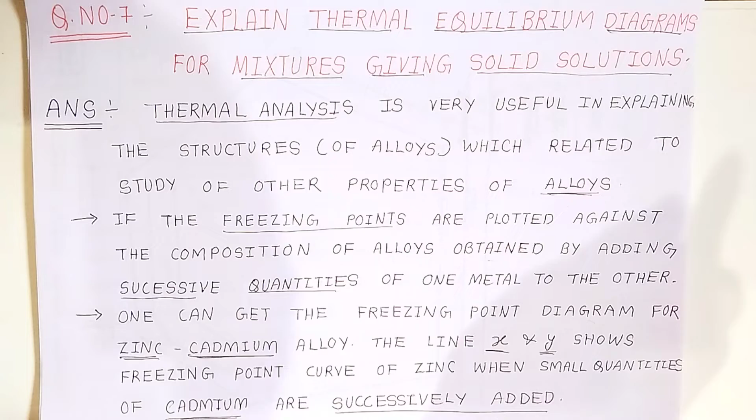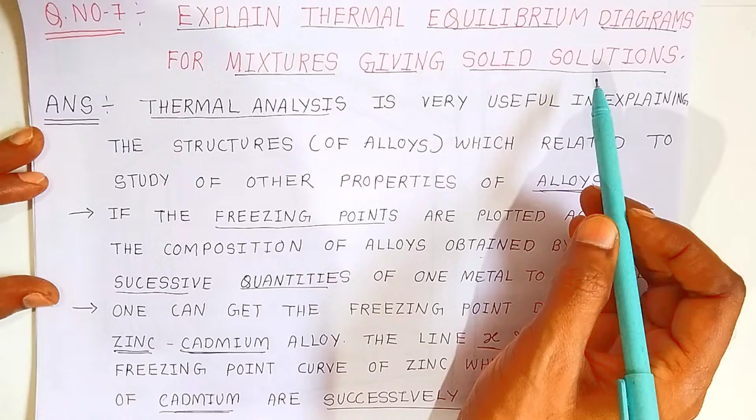In this video, we are going to see question number 7. You have to explain the thermal equilibrium diagrams of a mixture giving solid solutions. If you are getting solid solutions, we have to explain the properties on the basis of the thermal equilibrium diagram. Now, what is a thermal equilibrium diagram?

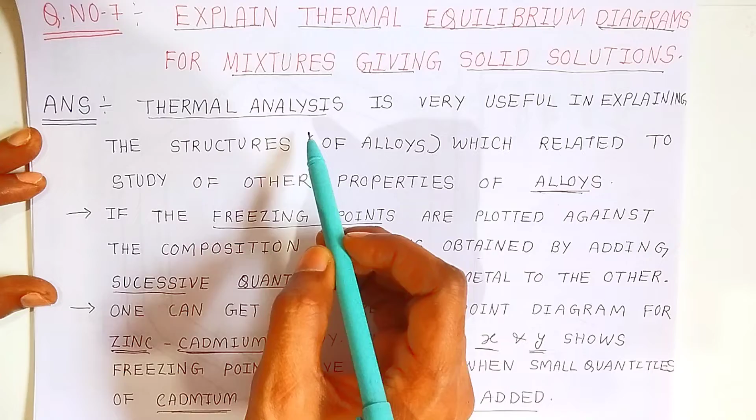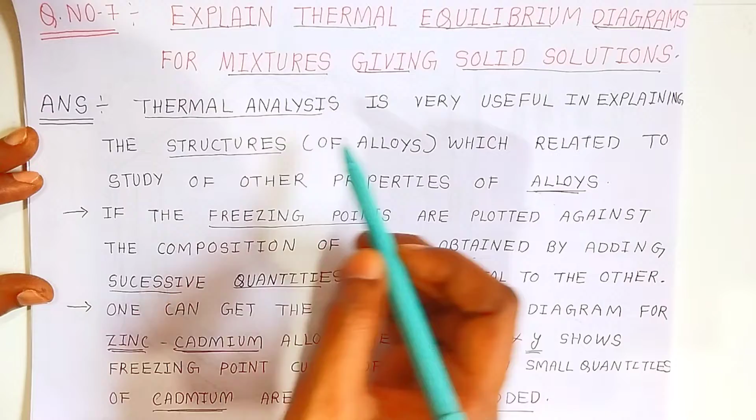First we will write the answer like this: thermal analysis. With the help of heat, we analyze the alloys. Thermal analysis is very useful in explaining the structure of alloys. It is also important for studying other properties of alloys. So with the help of thermal analysis, if you know its properties, then only you can explain the properties of alloys.

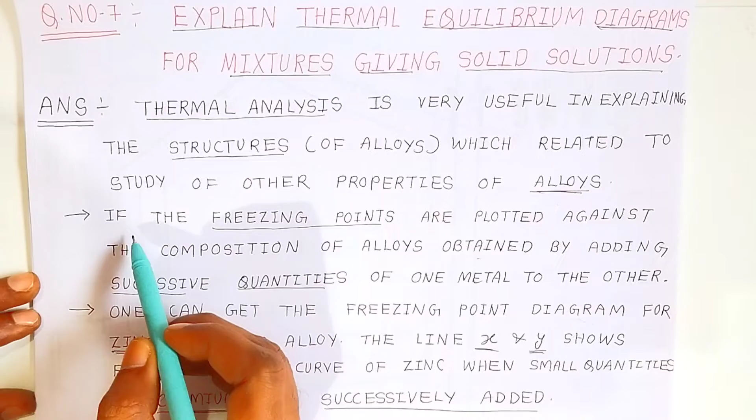If the freezing points are plotted against the composition of alloys obtained by adding successive quantities of one metal to another, one can get the freezing point diagram.

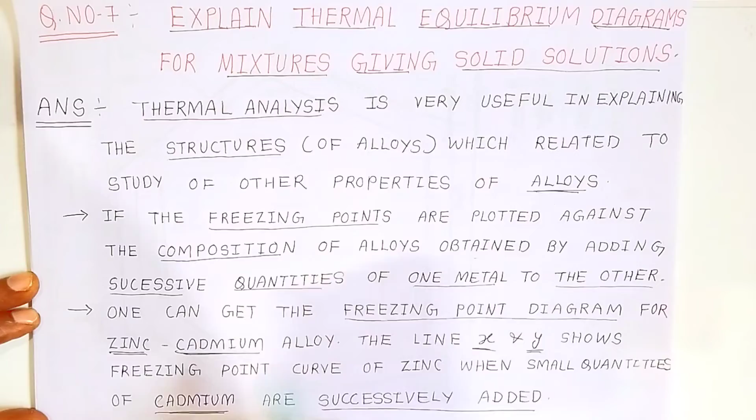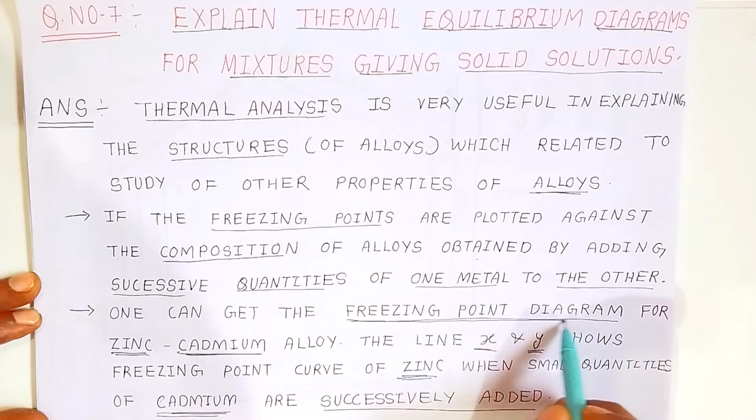For zinc and cadmium alloys, the line XY shows the freezing point curve of zinc when small quantities of cadmium metal are successively added. So we are going to see the freezing point diagram for zinc and cadmium.

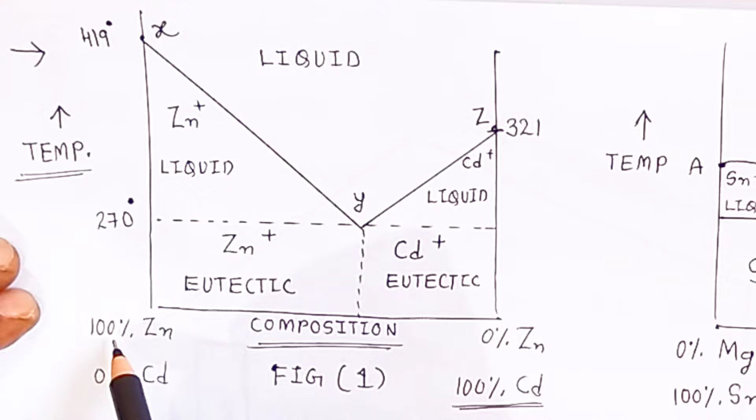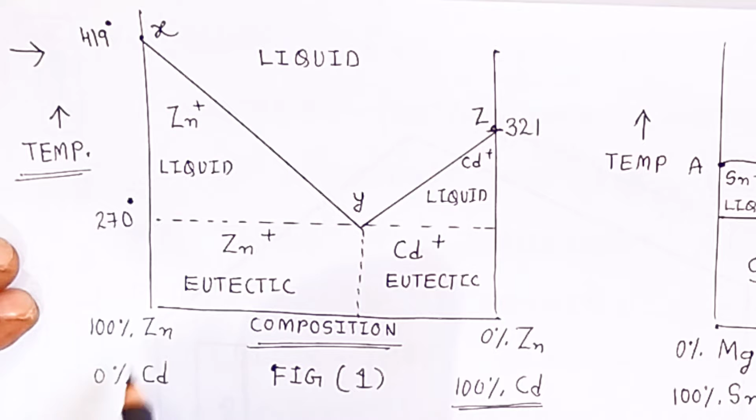When you go on adding zinc and cadmium, the composition changes - the quantity of zinc decreases from 100% to 0%, and cadmium increases correspondingly. So what happens to the temperature?

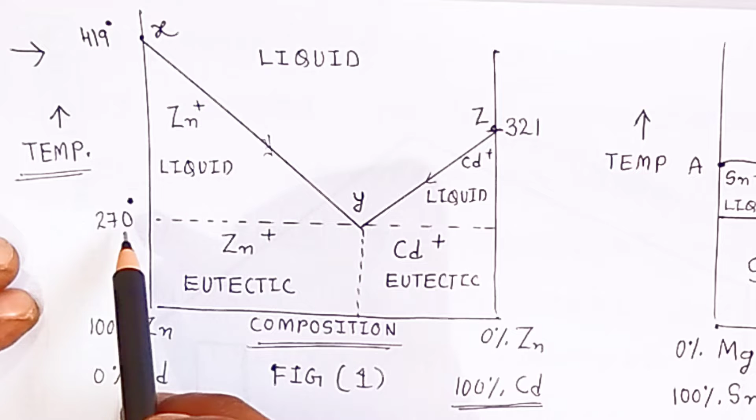The temperature of both metals goes on decreasing. See the temperature - now it is 419 degrees, it keeps decreasing, it is also decreasing. At 270 degrees Celsius, both will have the same thermal temperature at point Y.

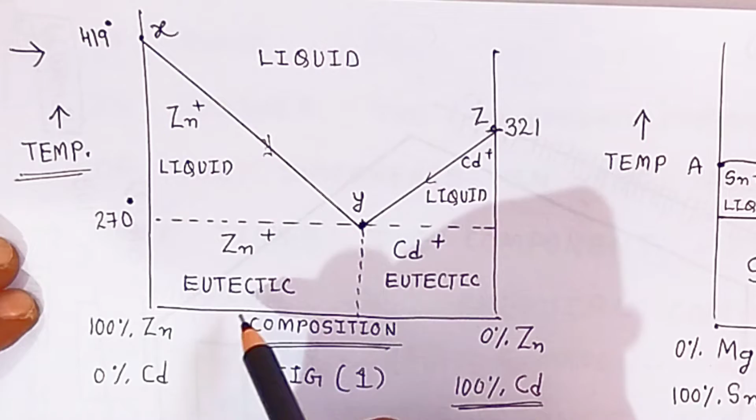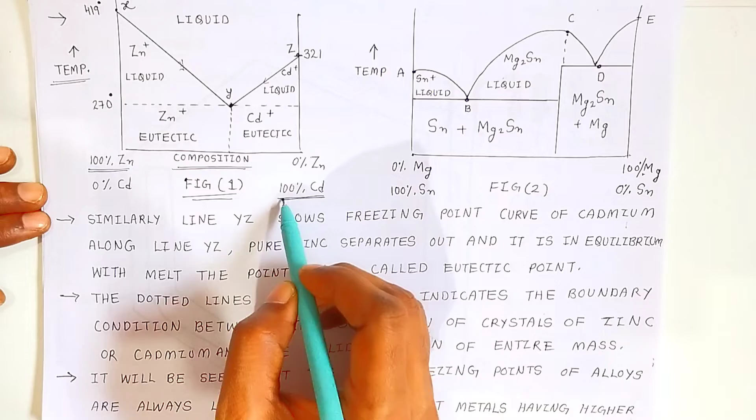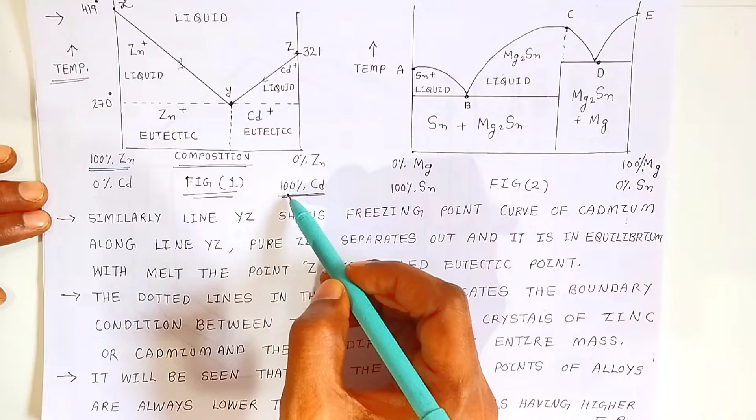That is what we wanted to show in this diagram, figure 1. Here zinc and cadmium are given - zinc is 100% and cadmium is also 100%. When we add them, zinc is present in liquid state at 419 degrees and cadmium, which is 100%, is present at 321 degrees Celsius. Both are present in liquid state.

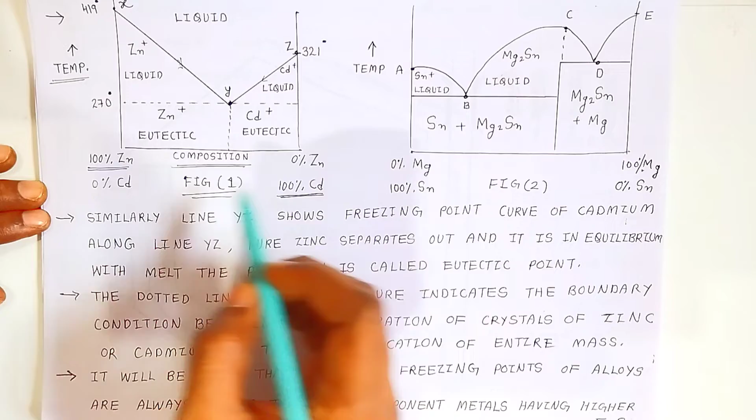When you slowly add cadmium and zinc together, as they are present in liquid state, when you slowly add them, they go to the freezing point and form the solid. See the boundary - below the boundary, all these are the alloys, the mixture of alloys. You find the freezing point at 270 degrees Celsius.

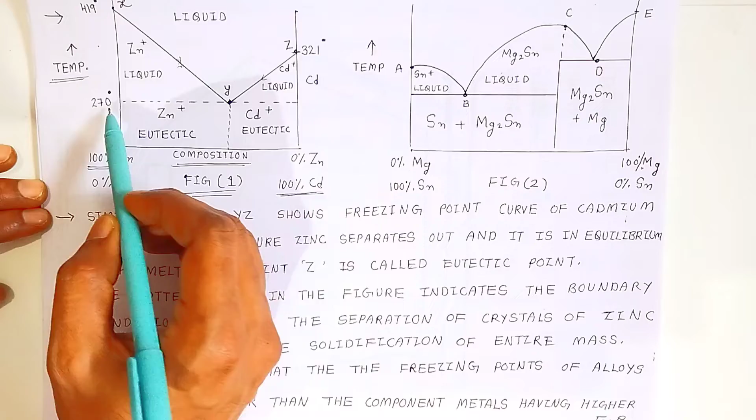This is called the eutectic point, the eutectic reaction. So they will form the solid solution - this is the freezing point of these alloys, that is 270 degrees.

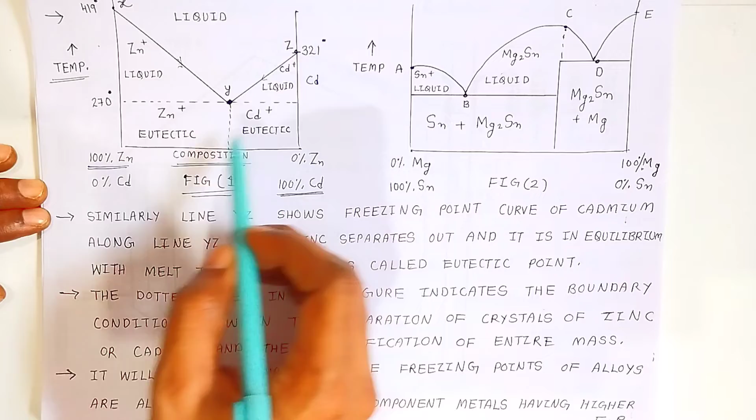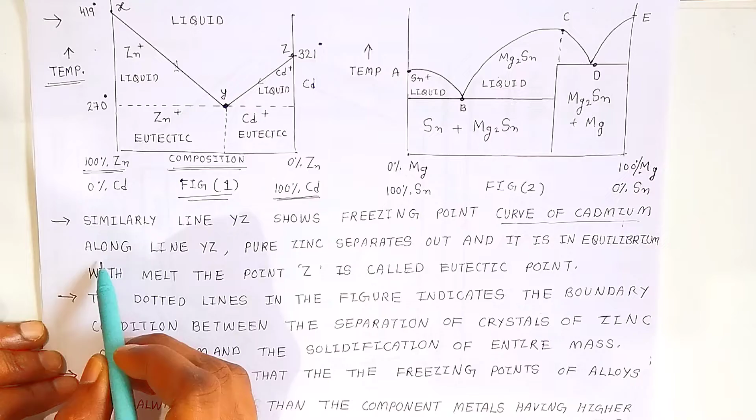Similarly, line YZ shows the freezing point curves of cadmium. XY is the freezing point of zinc, and YZ is the curve of cadmium. Along line YZ, pure zinc separates out and is in equilibrium with the melt, and point Z is called the eutectic point. This point is also called a eutectic reaction.

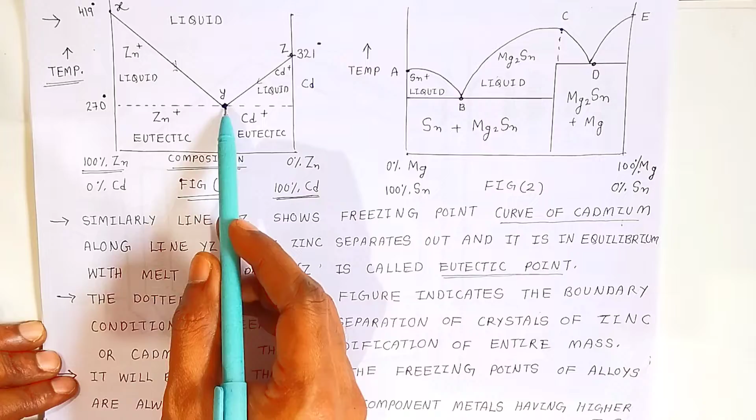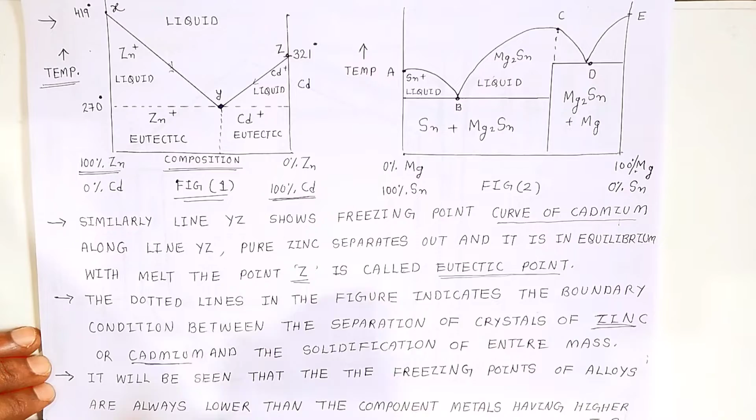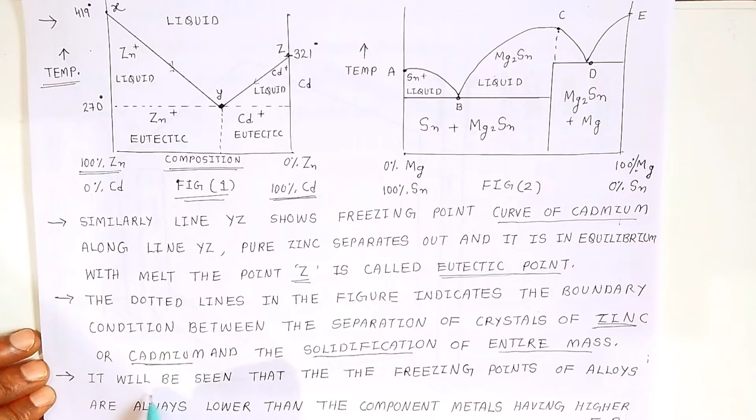The dotted line in the figure indicates the boundary condition between separation of crystals of zinc and cadmium and the solidification of the entire mass of alloys. This boundary separates the solid state of the alloys and the liquid phase of the metals. It will be seen that the freezing point of alloys is always lower - that is 270 degrees Celsius.

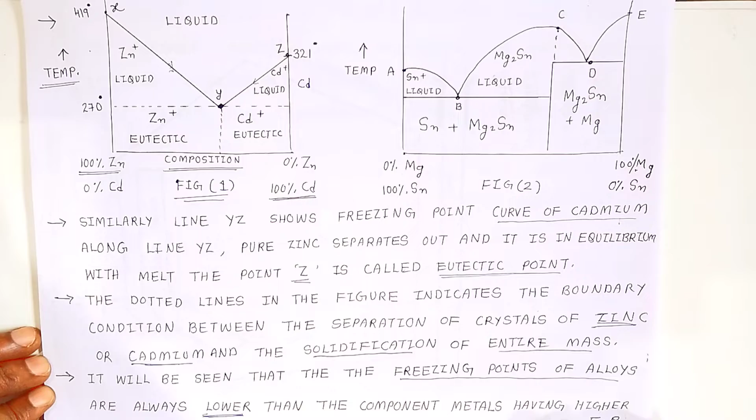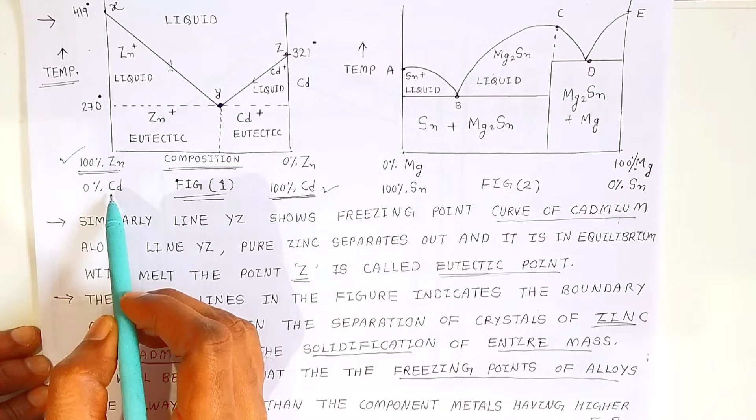...than the component metal having higher freezing point. The component metals here, students, are zinc and cadmium. That is why it goes from 100% zinc to 0% zinc. Here you have taken 0% cadmium and 100% zinc, and as you go on adding, it becomes 0% zinc. Understanding, students? So this is how this diagram is.

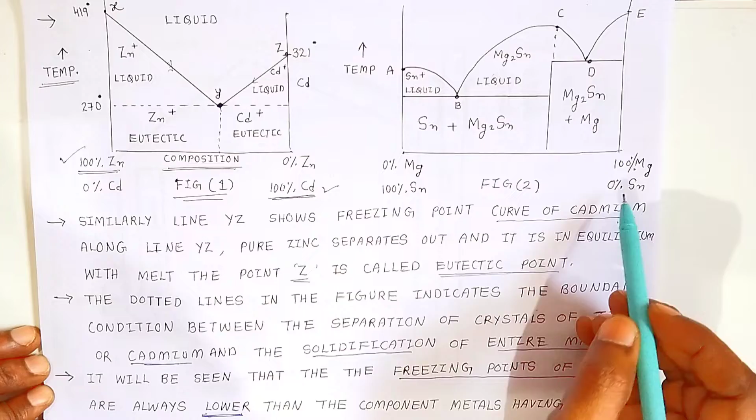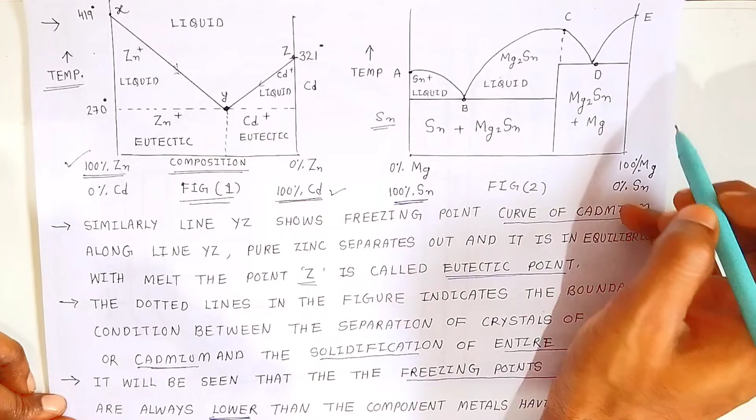Now here, students, this is the second one, that is magnesium and stannous. Here you have stannous, 100% stannous. So we are talking about the alloys of stannous, and here we are talking about magnesium. Now what happens? Here the stannous is present in liquid state, and here they are present in solid.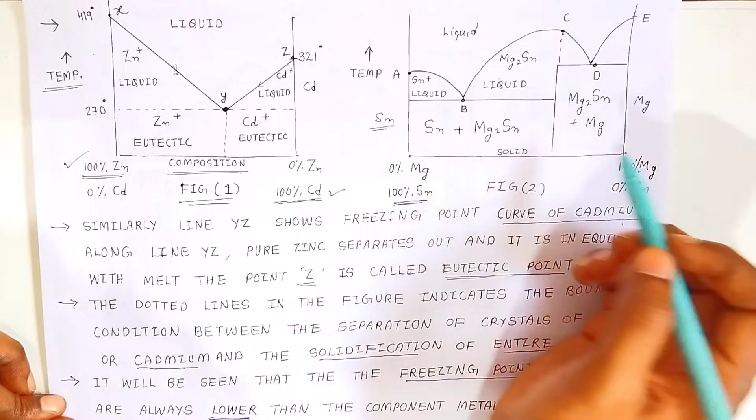Solid alloys. When you see the solid alloys, students, this is the square box. So this is the solid state, that is alloys. This is the phase of the alloys which are present in solid state, and here, students, you will find two eutectic points B and D.

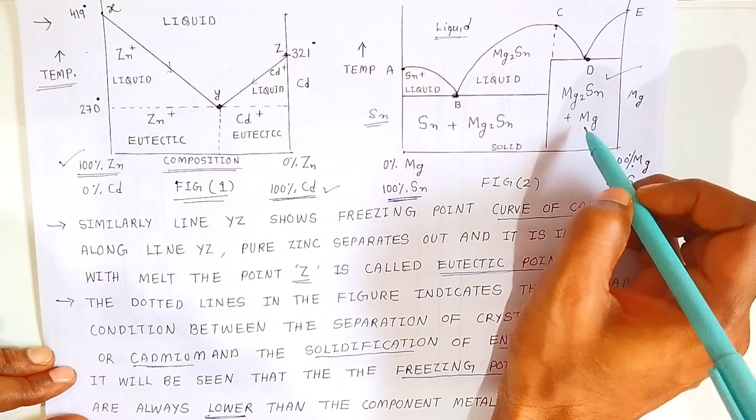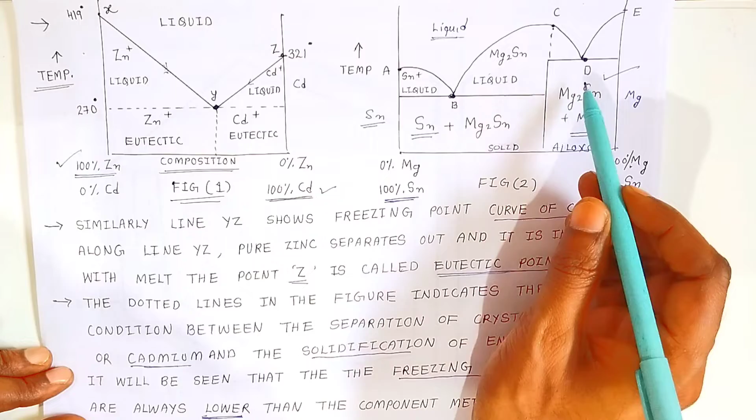So this is the alloy of magnesium and magnesium stannous, and this is the alloy of stannous plus magnesium stannous. So here the stannous will be more, here the magnesium will be more in these alloys. Both are alloys present in solid state. So here you are getting two eutectic points, as I have already explained.

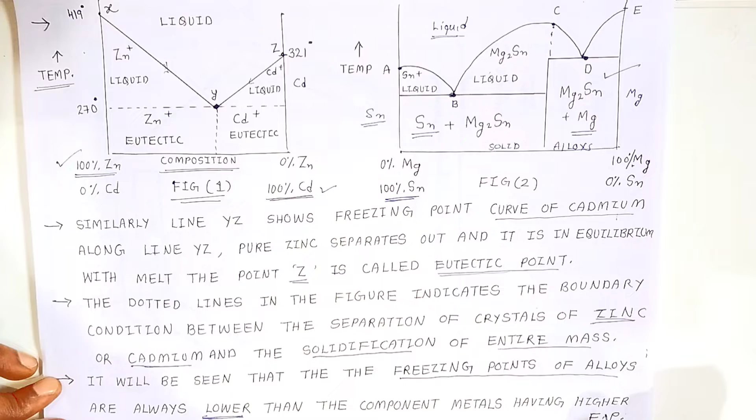The freezing point of alloys is always lower than that of the component metal having higher freezing point. So this is the higher freezing point. This is the liquid state, students. When they come here, they will form the two types of alloys. Now we are going to see the above case.

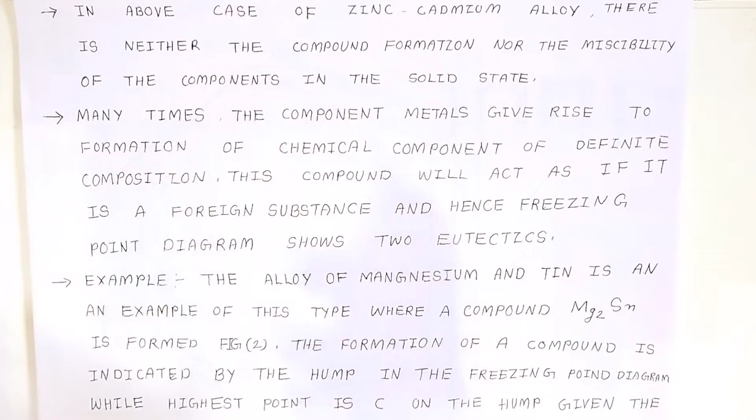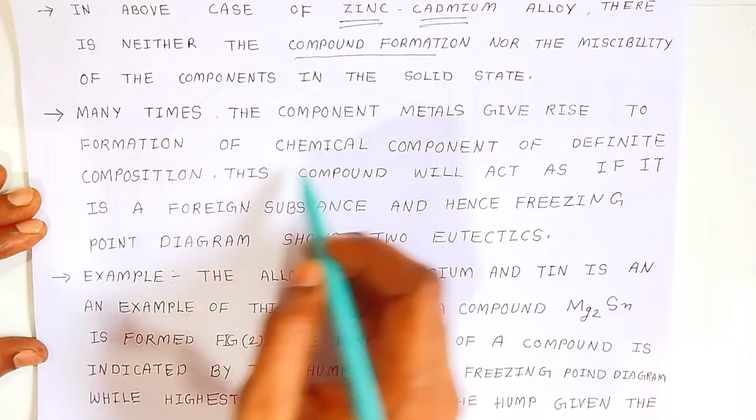In zinc and cadmium alloy, there is no compound formed, neither compound formation nor miscibility of the components in the solid state. Many times the component metals give rise to the formation of a chemical compound of definite composition. This compound will act as a foreign substance. Hence the freezing point diagram shows two eutectic points.

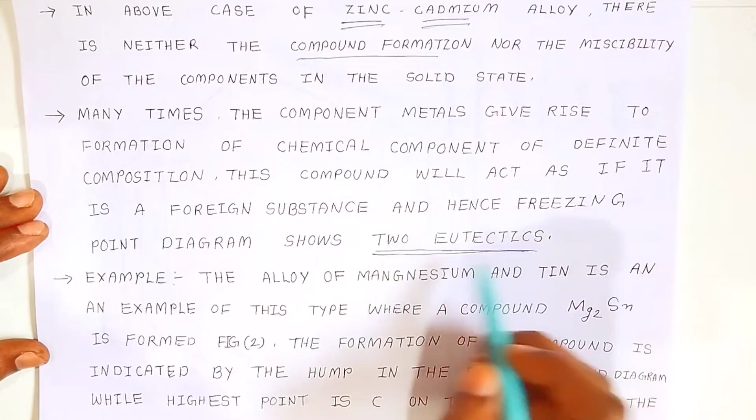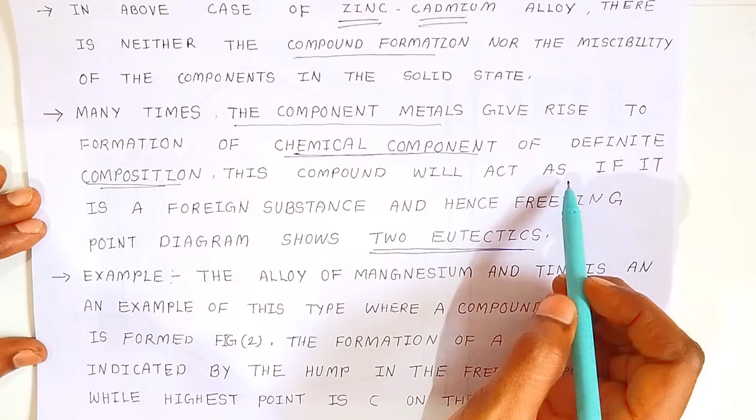Why is it forming two eutectic points, students? Because the component metals give rise to formation of a chemical compound of definite composition. This compound will interfere as a foreign substance, and hence the freezing point diagram shows two eutectic points. Why? Because of the formation of chemical compounds.

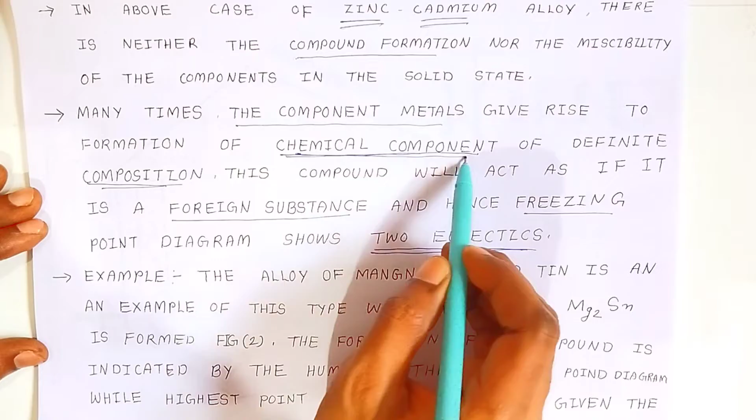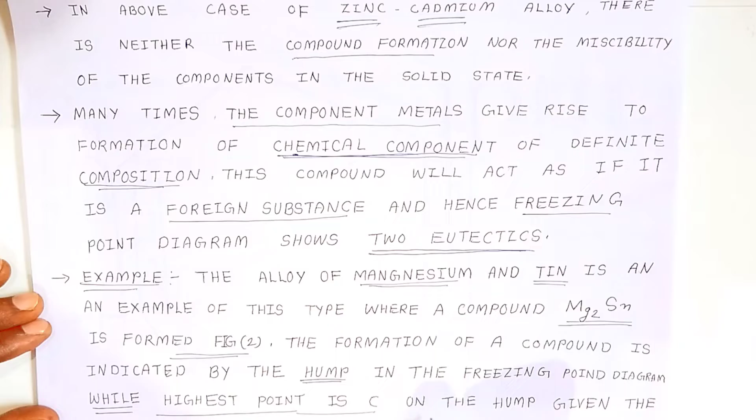Example I have already explained, students. The alloy of magnesium and tin, that is stannum, is an example of this type, where the compound magnesium stannous is formed, as explained in figure 2. The formation of a compound is indicated by the hump in the freezing point diagram, while the highest point C on the hump gives the composition of the compound as shown in figure 2.

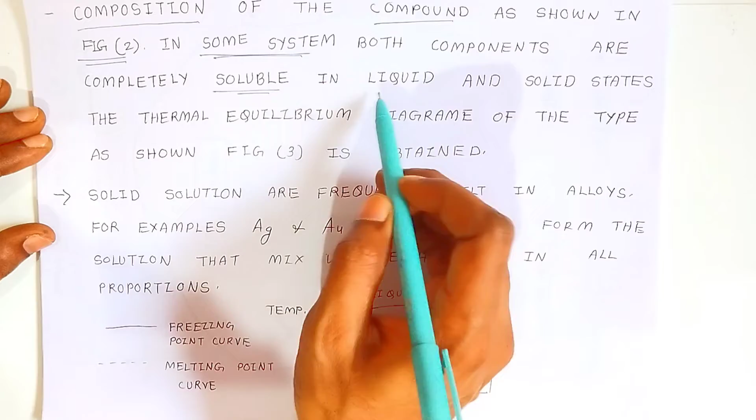In some systems, students, both components are completely soluble in liquid and solid state. The thermal equilibrium diagram of the type shown in figure 3 is obtained. So figure 3 is when they are completely soluble. Above this phase you will find liquid, and here they will form the solid. So when they are completely soluble, you get this type of alloy. The solid solutions are frequently met in alloys.

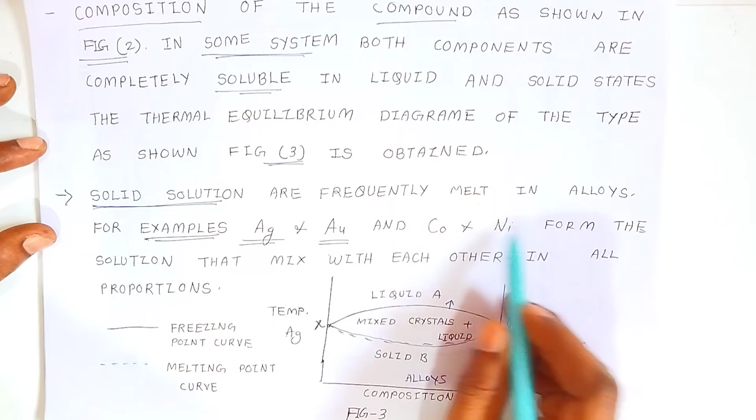Example, students: silver and gold. Silver and gold, cobalt and nickel form solutions that mix with each other in all proportions. So you get this type of diagram. Here the straight freezing point curve is shown, and this is the melting point.

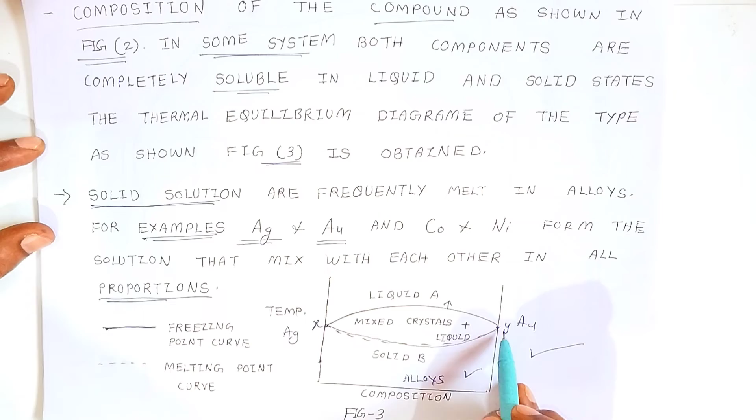So this is very important, students. In the board examination they may ask it as a 4 marks question. So this way you have to represent the answer. This is very important from the examination point of view. Represent the answer this way and you will get full marks.